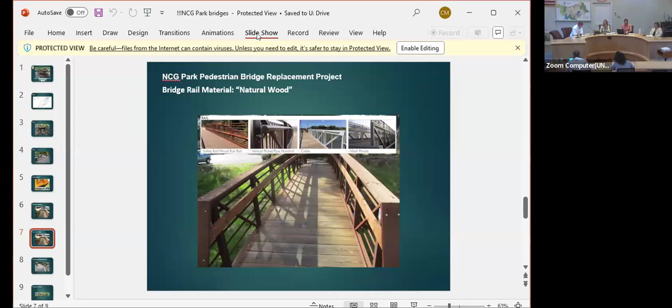So the first project, hold on just a second everyone, the first project we are looking at is the bridges up at Natalie Coffin Greene Park. The town planner will present that project, and then we will take it from there.

Thank you, Madam Chair, members of the Town of Ross Advisory Design Review Group. Rich Simonich, Public Works Director, on behalf of the Town of Ross, who is the applicant tonight. The applicant requests a recommendation from Advisory Design Review to the Town Council for a design review project where the town is proposing to construct, replace - we've already removed the old bridges - the proposed project with 3 new prefabricated steel truss bridges.

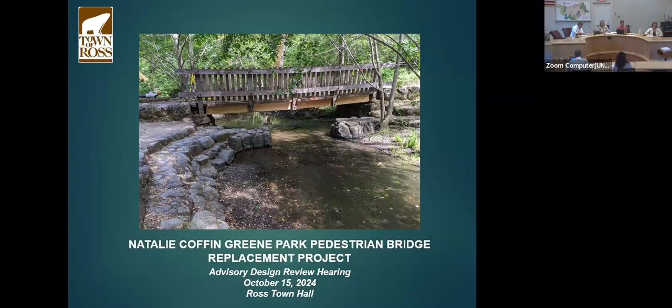So here's a little something to get you oriented if you're not familiar with the park, but I have no reason to believe that any of you are not familiar.

So here's the parking lot as you come to the end of the road at Natalie Coffin Greene Park. And the three bridges, it's the three smaller bridges. We're not doing the large bridge that goes up the access road to Phoenix Lake. That's MMWD, we're not doing anything with that.

It's the three pedestrian bridges. The first one crosses over to the Three Bear Hut picnic area. The second one is the one we just looked at right here. And then the third one is a smaller bridge that comes over into this last smaller picnic area down at the bottom of the slope.

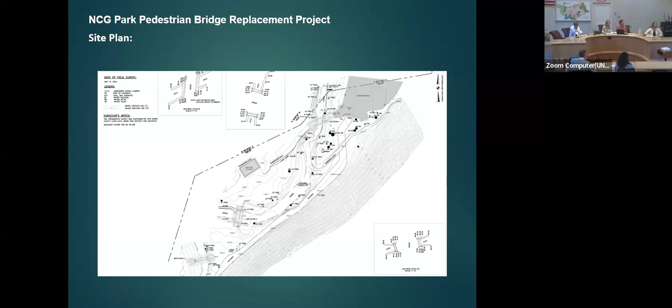And the main access road to Phoenix Lake runs up in this area. So this is just kind of what the first bridge looks like. You can see that this is one of the larger bridges, and the span really isn't that much. It's maybe 20 feet long. We have all the specs, I just don't have it off the top of my head.

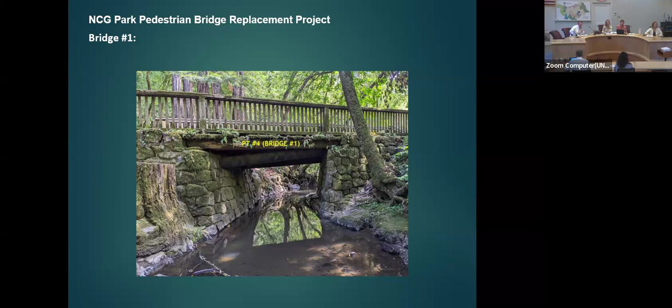But because the spans are so short, we're kind of limited on the product that we can select for the prefabricated bridges, but hopefully you'll like what they have to offer here.

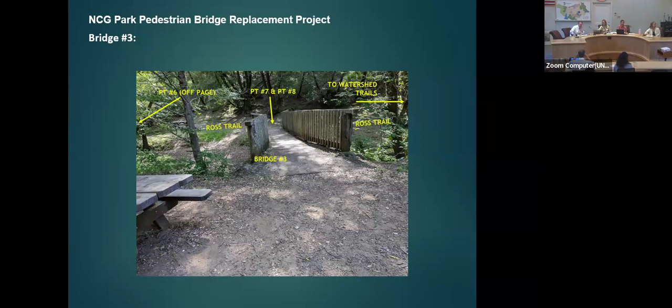So this is kind of the product that we're looking at, and this is the type of bridge that we would be going with. It's kind of the weathered steel that comes pre-fabricated. They'll deliver it to us looking like this, and this is a style you've seen with steel statues and things like that. We felt it was the most applicable, again, to the look and feel of the park.

There are other choices - basically you would have the nice painted, or chromium, or other colored painted steel types, but we felt this would be the best for the park as far as the steel structure.

But we do have a choice in the decking and the railing, so we can go with the natural wood planking provided by the bridge fabricator. The planks might need replacement every 10, 15 years, however it goes. They are easy to replace. Town staff would very easily be able to do that, and we felt that would be the best choice here.

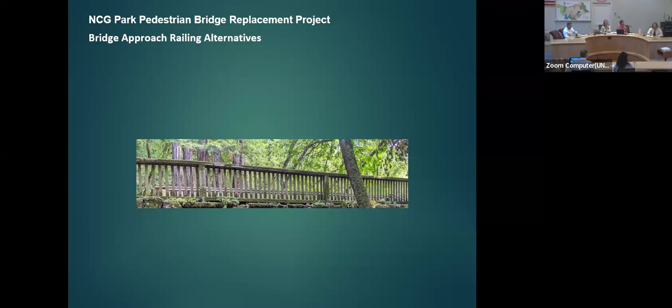Another choice could be the split rail, or we could also go back to what was there now, this picket type railing. But staff feels that the hog wire fence would be a better match to what's up there now and would retain the rustic feel of the park.

So that concludes my presentation for this project, and I'm happy to answer any questions that you have.

Does the ADR have any questions? Yeah, just could we flip back to the handrails real quickly?

Your selection on the wood, I wasn't certain what you're showing in that photo. That top rail, is that wood or is that steel? I apologize, that's a wood plank on cap, on top of the steel.

Thank you, and I didn't go over the other options they have. On the top left here, you've got your basic steel rail type handrail, and then there's cabling, and then there's these mesh panels up there. None of those really grabbed staff's attention as much as keeping with the wooden rustic look.

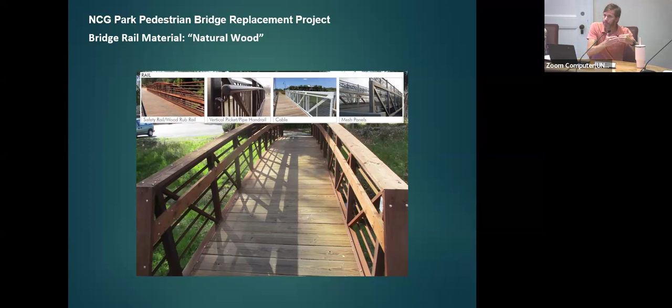And then the approach handrails, the ones at bridge number 1, they're the hog wire one that you pointed out, and the split rail that kind of leads up to the hog wire. Are all those remaining, or will that hog wire and rail and split rail remain as it is today?

Yeah, so that's the zone between the bridge and the Three Bear Hut, that's going to stay there. That's why we kind of like to match the hog wire leading up to that first bridge. So bridge 2 and 3 would have something similar, just the hog wire portion, not the split rail leading to the hog wire, because you don't need it.

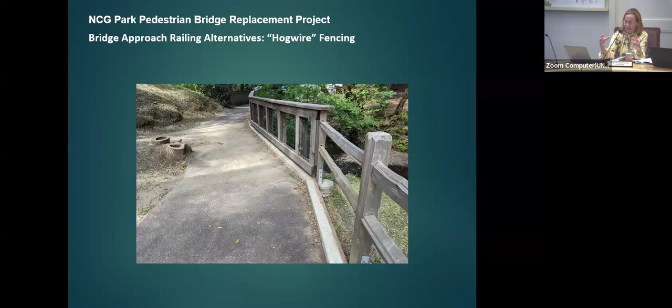Okay, yeah, thank you. I have 2 questions. So the stone abutment will remain on all the bridges, and then the steel structure would just be laid over that? Yes, that's correct. Okay, so that's one question.

And then the steel itself, that finish that looks a little orangey, do we have choices on that? Could we have something that's maybe more like an oil rubbed bronze, or something a little darker?

There may be with other bridge manufacturers, and this brings up a good point, that we can only provide for bid purposes a spec, a performance spec. This is what we want, we need you to match it, as good or better.

I kind of like the idea of the rubbed bronze, that might be something we can consider. I don't think this particular bridge, Contech, really has that. They just have you either go with this, or you get the galvanized or the different painted styles.

I think the Corten is pre-weathering, kind of a thing that will arrest itself at a certain weathered point. If a bronze color is not available in steel other than galvanizing and then painting, I think, right? Because other options would be a galvalume or kind of a galvanized kind of stuff, or a powder painted coating finish.

If a dark bronze is the desire, then I think it's a paint. I think there's no kind of self-protective weathering surface that is a bronze color. I think the Corten is it.

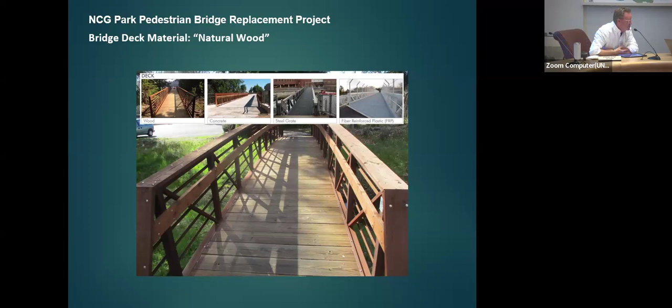I think that's the same finish, it just appears differently - I think it's brighter when it arrives and it does get darker. I don't think it stays as bright orange, but that's quite a bit more mellow. This one looks like it's been in this big picture here for a few years, really, but the same weathered steel is down here too, and it looks a little bit more mellow.

So this definitely looks like they built that bridge quite a few years ago. That's kind of the different types of color you'll see eventually on this weathered steel.

Is it something you would get a sample for? Because in that picture, it looks like it could also be part of the lighting. I can try for the design review portion of this. I don't know if they can send a piece of steel, but I can definitely try. I don't see why they wouldn't.

Maybe they could actually point us to a local area where they've done this, because there are 2 or 3 of these in the area. I know I've walked across them myself. I just can't recall whether there's one in Lagunitas, or San Rafael that crosses over part of the marina area. That could be, I'm not sure they use this type of finish though. Maybe.

I know you can't, in the spec, delineate who's going to build it, but whoever ends up submitting the sample, you may be able to say, have you done something in the local area that people could look at? Yeah, not sure, it's kind of tough with the public bidding aspect of it. Right, we can't tell them you need to use Contact. They can use Bridge Brothers or Continental Bridges and things like that.

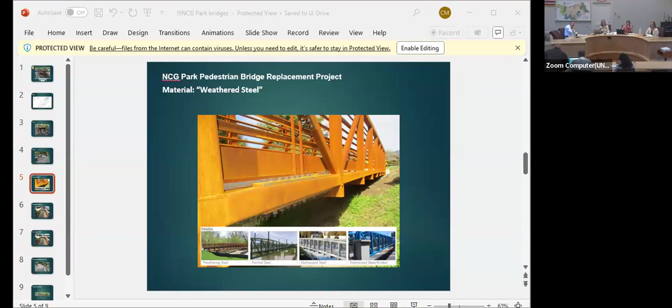Okay, so we are going to bring it back to the ADR for discussion and recommendations to the town council. Who wants to go first?

I like the staff recommendations completely. I like the wood walking surface, the wood rail, and the wood rub rail. I think the photo of the Corten is handsome in the example that shows the rub rail. It would be interesting to get a sample of the Corten, or know what happens to it over time, and if it darkens like that, that would be great. If it gets more orange and more intense, I don't know, that gives me pause. But I think it gets more dark over time in my experience, so I think it should be okay. But I like all the suggestions.

I like the split rail and the hog wire both, so for instances where there's not fall protection required by code, maybe we do the split rail, or if you're going to use a mix of solutions, I would default more to the split rail just because it's more country and relaxed, if there's a choice. But I like all of the suggestions, I think it's a great job and great selection.

Yeah, I concur with Stephen. I think it does darken. Also, that one photograph makes it almost look like it's in bright sunlight, like an almost setting sun. All these bridges are in a kind of dark environment, beneath the trees, so I don't think you're going to get that shot of light on it very often. I think I like the wood pathway surface as well.

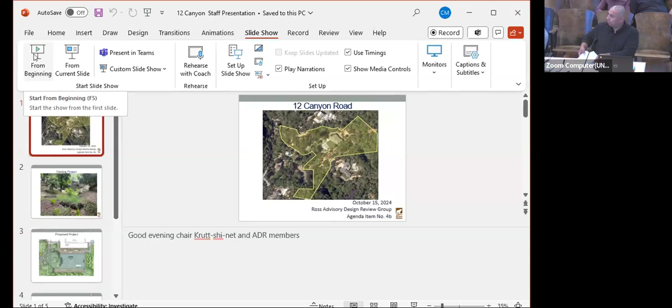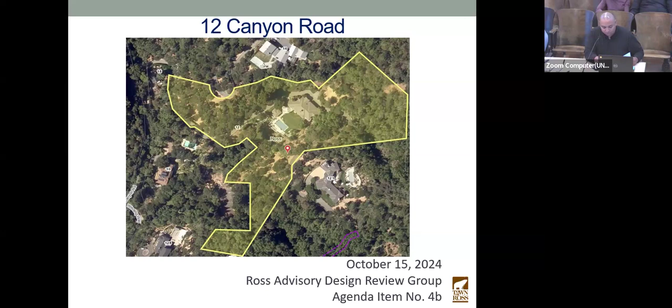Good evening, ADR members. Tonight, the applicant and homeowner at 12 Canyon Road is requesting a recommendation to the town council for design review and a hillside lot permit. This is the existing project here. The project is proposing to construct a 60 by 30 feet sports court on a raised wooden platform adjacent to the existing pool deck. The sport court will be located 45 feet from the side yard setback and 93 feet from the rear yard setback, in compliance with the zoning regulations for the R1 B5 zoning district.

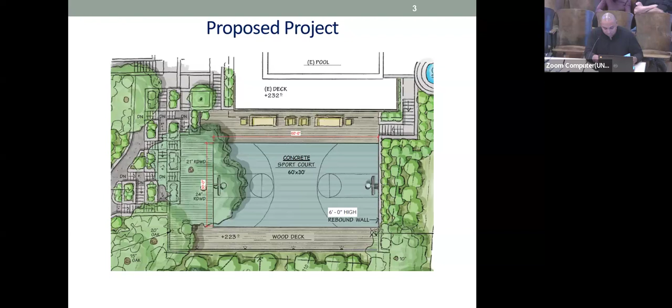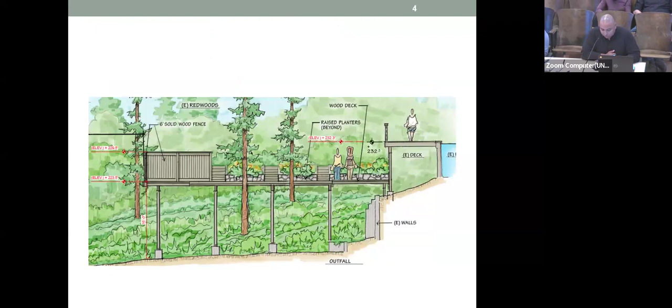The sport court will be a concrete surface and will have a 6-foot solid wood fence. The area beneath the court will remain a natural garden, and all lighting will be low voltage and downward shielded. Staff requests that the ADR group discuss the merits of the project and provide a formal recommendation to the town council. Thank you.

Thanks, Alex. Roberta, were you going to say a few words about what the town had to say about sport courts and pickleball courts?

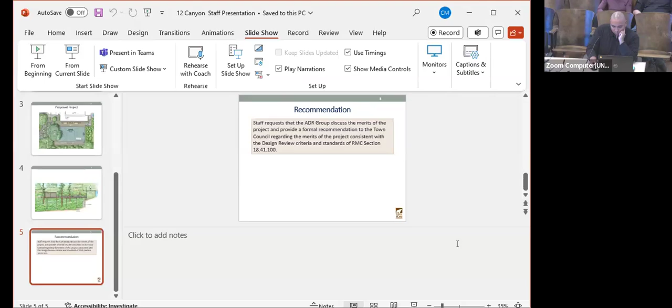Sure. So during the September 12th and then also during the October 11th town council meetings, the town council did discuss pickleball courts specifically. Their guidance to the ADR, because you are reviewing two sports courts this evening, is that there would be a condition of approval that states these two sports courts would be subject to any regulations related to pickleball. During the October 11th town council meeting, some of those possible regulations could either be keeping the municipal code as is and not regulating pickleball courts.

It could be a distance requirement from the property lines. It could be that pickleball courts would not be allowed on residential or private property. And then it could also be that a pickleball court would be a use permit type classification that would require any of the sports courts being approved at Bellagio, 12 Canyon, and 160 Lagunitas to return and apply for a use permit. Likely that would require noise mitigation, whether it's with a barrier, through equipment, possible hours, those types of conditions.

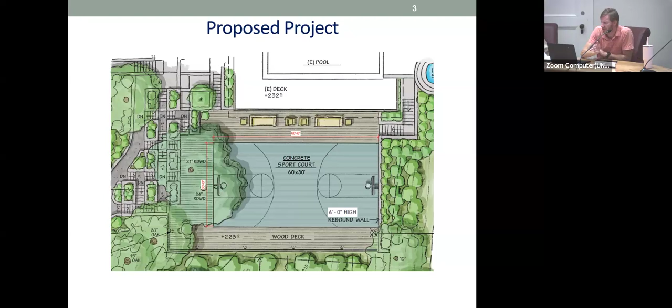Okay, thank you — yeah, I might be thinking of a different tree, on the opposite side from the rebound wall, but I could be wrong. Yeah, that's a horse chestnut. Okay, yeah, I noticed that today. But we're keeping two redwoods — the text kind of blurs the one that's close to the court, and then another redwood within the raised planters that are there now, which we need to rebuild since the bottom parts are falling apart. Part of this is really to beef up the screening between the fence and the court itself, and there are quite a few large redwoods down in that space as well that we're going to maintain.

We're going to remove the bridge, remove the pathways. There's a zip line across this area that's going to come out, and there's an old couch down there, and a bunch of old materials. I think this area is used by kids a little bit, but it's certainly underutilized for this project site.

One other question, Brad, if you could — can you talk a little bit about how you determined the height of this particular sport court versus the height of the existing deck or the height of the base of the canyon?

Well, there's a couple things. If you noticed below the pool, there's a door that goes into the deck leading to the pool equipment. So I used that door to set the height, and I didn't want to remove any of the wall below the pool — there's at least a 10-foot tall retaining wall there. So I have my structure going right over top of that retaining wall. You can see it in that drawing, the existing walls — it's kind of this triple stack old wall, and I wanted the decking to be above that. I didn't want to lower it anymore because on the uphill side I'd start getting into a taller wall. The rebound wall on the uphill side basically has to be 6 feet tall — I could maybe lower it a little, but thought it would be a good wall to have as a return wall. If I lowered the deck, that wall would get taller. So this court got squeezed in, and honestly it fit surprisingly well.

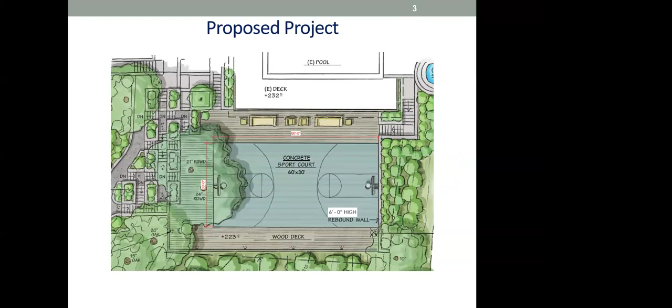Got it, thank you for that clarification. Just to follow up, where is the 6-foot rebound wall you're talking about? That's on... which way is north here... it's on the side of the court, away from the driveway, if that makes sense. If you're looking at the court, there's a wall on the right side. If you're looking at this drawing, there's a basketball hoop on both sides, I guess.

Can you pull up the section with that? It doesn't show it on that drawing. There's an elevation I did, kind of last minute, that staff asked me to create of the rebound wall. I just did this the other day, but I don't know if staff has this or not. I do, I can pull it up right now, the computer's just a little slow.

And that wall is holding the hillside, and then there's stairs bisecting that wall that go up to the existing pool area.

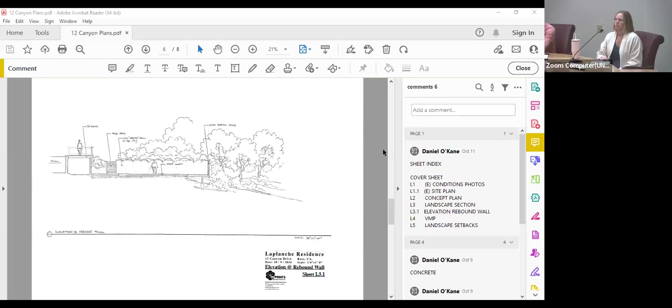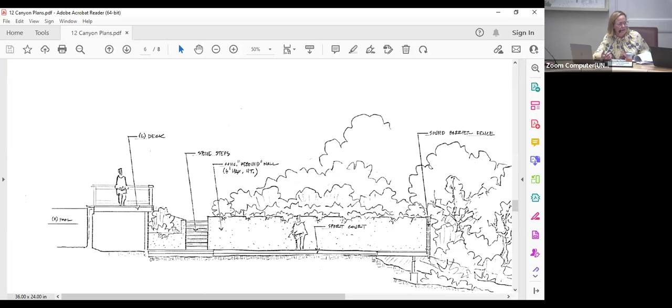I have a question, Brad, it's Joey. If you were to move the entire court in front of the retaining wall for the pool and push it down in elevation, maybe even lose the side deck down the canyon, would you still meet the setbacks? The question is, how much could you push it down and still make it work, lower in elevation, and not use that retaining wall for the pool as your reason for being there. Just go in front of it.

Yeah, the door into the pool equipment has some impact on that too. I could maybe put a landing there and have a couple steps up to that door. I think I could lower it a foot, or maybe 18 inches or so. I'd have to really look at the survey, because there's also the redwood tree on the other side that I was trying not to take out.

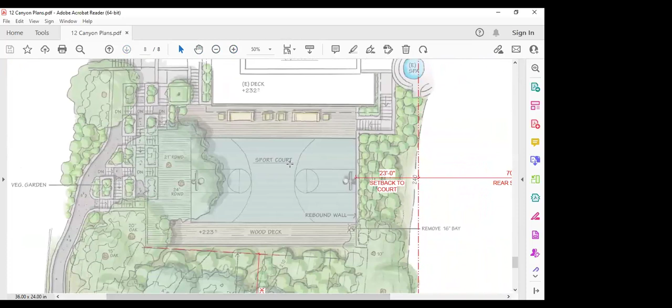So by the hoop on the left side, there's a big redwood tree right there. It's not super big, it's a 24-inch redwood, but I'd have to really look. So if that was a desire, to see if I could lower it, I just need to look and see if I can do it.

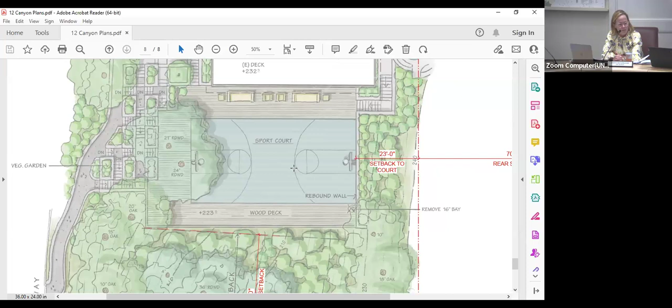Okay, just was curious about that, if we just ignored that one constraint and put it in front of that and pushed it down. Yeah, but when I did this, I used that 45-foot setback as my guide, just to adhere to the 45-foot.

Right, but you have the wood deck on the downhill side, that maybe, I don't know, I'm just asking. Some of the goal of the wood deck was to provide a buffer so balls don't bounce off and end up down there all the time. So it could be looked at. I thought of this a little bit today, could I push it towards the pool a little bit and maybe reduce the deck a little bit?

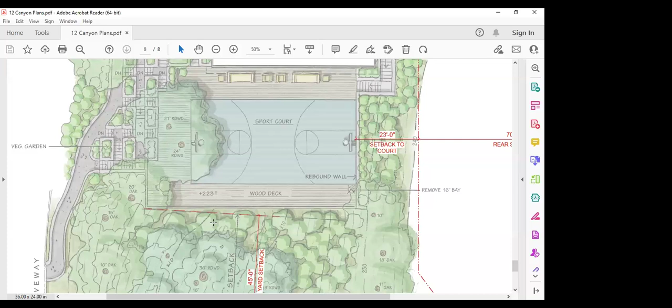We're totally open to talking about some compromises, and this is just, we're trying to get started here.

One other question, the 6-foot fence you were talking about, it's an acoustic fence, is there a certain assembly? I think I saw an assembly described. Yeah, it's basically overlapping boards, so there's not any gap in the boards, so it's got boards that are shiplapped.

That's fine, but after talking yesterday with the sound guy, I thought maybe having this be more glass, because in the beginning I really wanted this to just float in here and be as green and transparent as possible, so when you're looking at it from a distance, it still feels like a natural setting. I'd be totally open to it, and he said a tempered glass barrier could work, or even a thicker plexiglass framed in some kind of wood structure could work as well.

Is there such a thing as a sound-rated plexiglass or glass material?

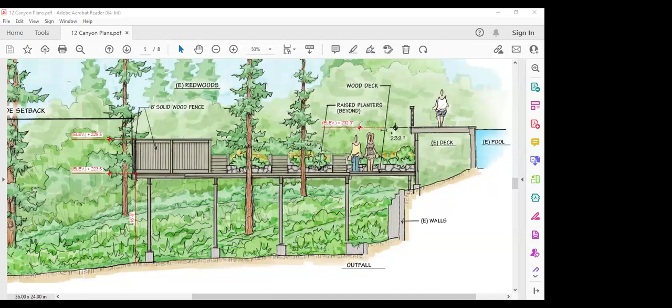He said as long as it's solid, it might be online, but as long as there's no gap. So it would be sandwiched between like 6x6 posts with stops or notched in, it just wouldn't have any gaps in it. He did a whole design on this based on acoustic codes for Ross and Charles Salter, they've been around forever, and he's extremely knowledgeable about this. Yep, I saw the report.

Thank you. Do any of you have any other questions of Brad? I have one additional question, Brad, which is what provides the lateral stability or the seismic resistance in the sideways direction underneath? There would be cross wires or diagonal struts or something underneath, presumably? Well, what we did on this other project, that was 20 feet off the ground, it was like 6x6 tubular steel on grade beams and piers. And I believe there was cabling, cross cabling that went through with turnbuckles that you could tighten everything down. Obviously this is going to be structurally engineered for building permit, but it's a tubular steel structure that tries to keep as lightweight as possible.

We'd paint it flat black, which we could also do with the posts of the railing. Whenever we're trying to get something to disappear, we paint it flat black and then plant all around it and have it go away.

The interesting thing on the San Anselmo project as well is the fire department loved the project. I was shocked when they reviewed the project. They thought it was the greatest fire suppression concept that they'd seen, and they were so highly supportive of it. I don't know if that's any consideration on this project, but I thought I'd throw that in there as well.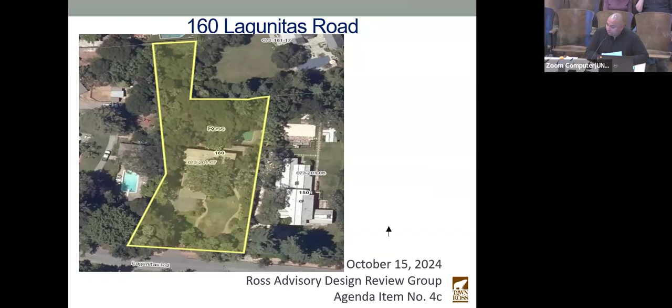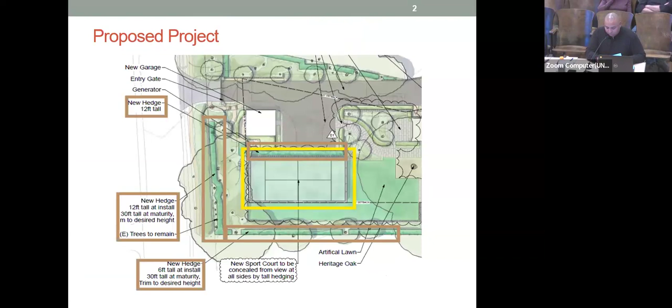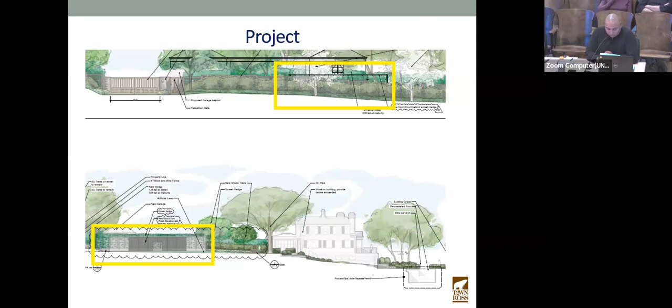Good evening, ADR members. Tonight, the applicant and owner at 160 Lagunitas is requesting a recommendation to the Town Council for design review. The project proposes to construct a 66 by 33 feet sport court in the front yard of the property. The sport court will be located 25 feet from both the front and side yard setbacks, in compliance with zoning regulations for the R1BA zoning district. The sport court will be made of artificial turf and will have a 10-foot-high glass wall with a thin steel frame. The sport court will also be well screened with tall hedges on all sides. Staff requests that the ADR discuss the merits of the project and provide a formal recommendation to the Town Council.

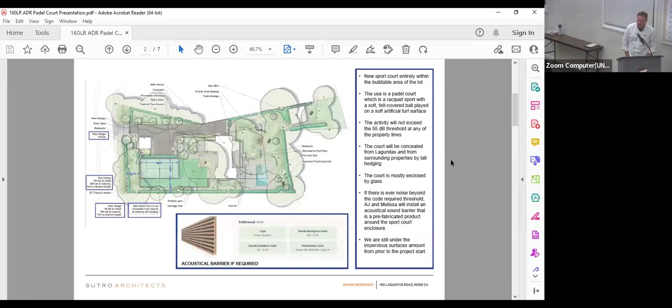This just shows the position of the proposed court relative to the setback, so it's in the buildable area. Eric Blasen is here, and after we talk about the function and design of the court, he'll talk about the screening and the planting around it.

We prepared a lot of information about the sound for this court because we thought we might talk about it this evening. So we can skip over that, or touch on it briefly, but we'll be prepared to discuss it fully at council. This is a padel court.

Padel is new to me, I hadn't heard of it before. Now I'm interested in playing, but it's a soft surface court. It's astroturf, or artificial turf, laid over permeable concrete, so we're not creating an impervious surface with this court. It's a softer surface than pickleball, the ball is felt-covered, and it's played with a racket that's softer than a hard pickleball racket. I just want you to understand what they're interested in doing here.

This sport is growing and is interesting, and the sound is similar to tennis. But because there are glass walls on the court, a lot of the sound is captured by those walls. There are openings at the sides, so there's definitely some leakage, but we've done sound studies, and the decibels erode as you move away from the source, with the glass capturing some of it. We conclude, to the best of our ability, measuring with the client playing on a different court, that it'll be less than 55 decibels at the property lines.

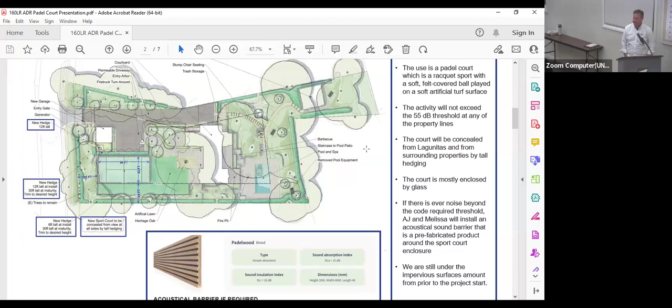I think we can click on the next slide, Alex, please.

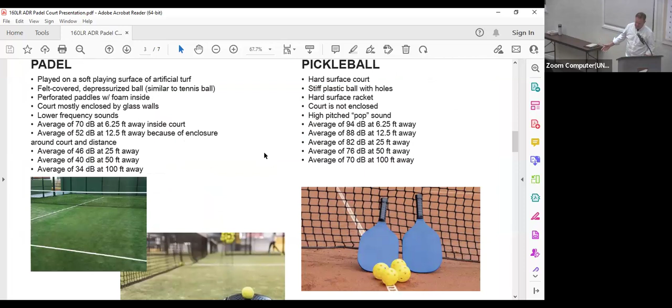These are differences between pickleball and padel, just because pickle is such a hot issue, showing how much sound noise is generated by each and how that sound erodes at distance. We can skip over that and present it to council, unless you guys are interested in question and answer. This is a diagram showing the anticipated decibel level in a circumference around the court, and most importantly at the adjacent property lines, which in our estimation and measurement would be less than 55 decibels.

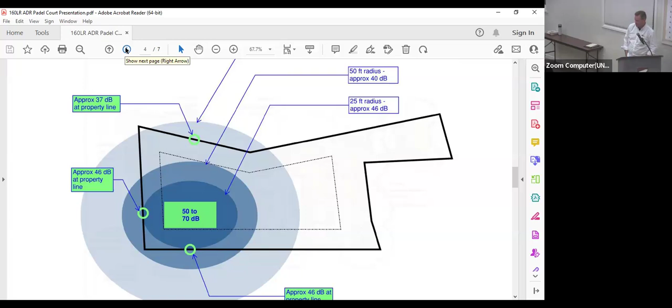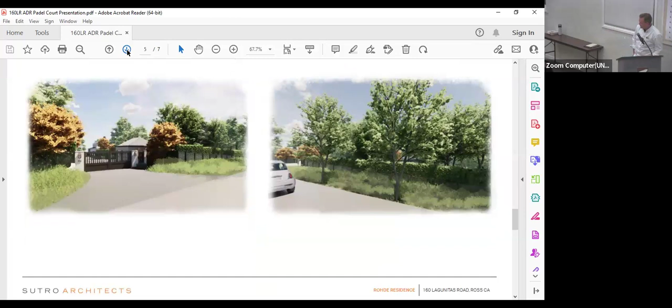You can skip, Alex. These are views, renderings from Lagunitas, and it's hidden from view by the tall hedges behind the fence line, and by a hedge behind the garage, and on the other side by hedges along the property line. So these are disappointing renderings from an illustration standpoint—not very exciting in that it's not visible here, but it's important to see that.

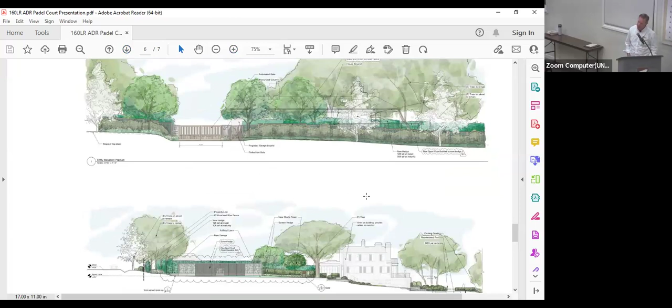Next slide, Alex. These are elevations. Eric, do you want to say anything about these? Eric prepared a planting plan for this, and there's a slide showing a sample specimen they would deploy along the property lines and the fence line, just to illustrate the height upon planting.

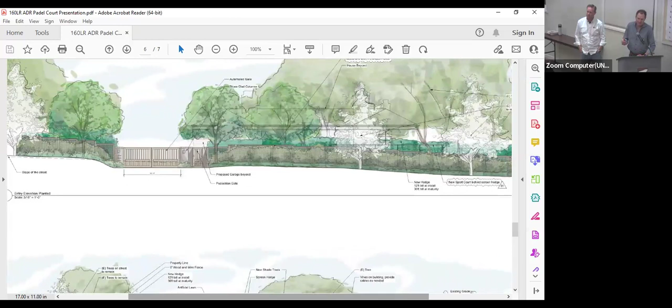Hi, Eric Blasen, landscape architect. On the front area, we're proposing to put in, and I'll show you a picture of the actual plant, a Laurus nobilis, a bay laurel, in a 36-inch box, so it's 12 feet on the get-go, and then it's going to grow even taller.

The other interesting thing is, if you look at the section down below, here's the street, and the padel court is down here—that's a 5-foot grade change, so it's 5 feet lower already from the street level down. We're not doing any crazy grading because it's flat, so it's a very low impact situation that we're doing.

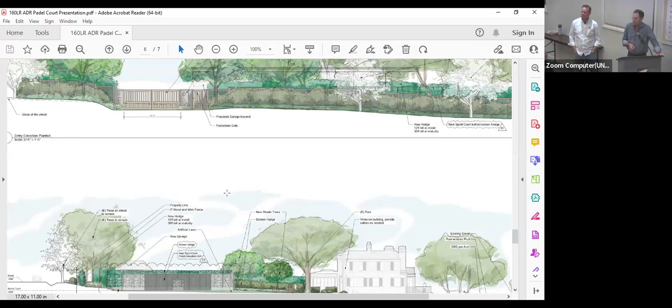So I'd go to the next visual. That's an actual picture of the hedge we're proposing to plant along the street side, and we're proposing similar ones on the sides, but a bit smaller. People coming on the street will never see this because it's also 5 feet lower than the street side is. It's an evergreen, and you can cook with it too—it's cooking day.

So if you have any questions, happy to answer. Thank you. Do either of you two?

I was just going to ask, what spacing for those hedges are you planning? They'll be touching, actually—I want to say about 6 feet, so we won't have gaps in them. And then it'll grow even taller than that, and they can set whatever height they want it at.

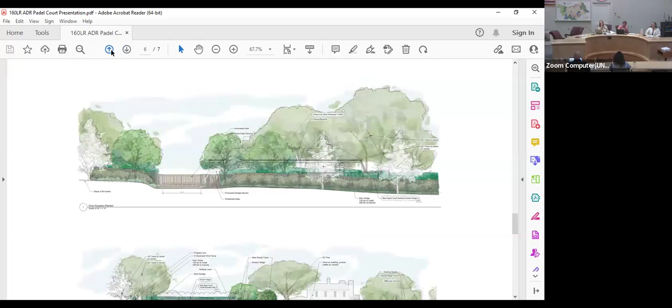Thanks. Any other questions? Maybe one for Stephen—could you give a little more description of this glass? Is glass part of the actual court usage? You mentioned it drops down at some point or comes back up? Just a bit more detail: it's surrounded on the ends and about 40% of the sides. The glass is part of the play, so the court has no out of bounds—it goes all the way to the glass, and the tennis ball, which is more decompressed or softer, is played against the walls. So the glass is part of the specification and part of the sport.

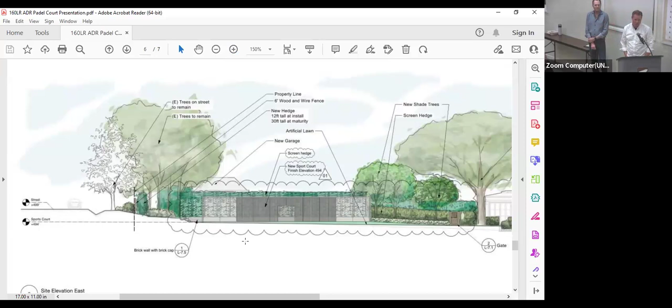The sport also calls for 3 extra feet of height on top of the glass that they don't want to do for visual reasons. So the real sport specifications ask for a 13-foot tall structure, 10 feet of glass, and another bit of chain link above that.

And it was a cross too big to bear for Melissa, who didn't want that. Yeah, thank you. And the glass is just clear? Unless you add the acoustical panels or something?

The glass is clear, yeah, but right on the other side of the glass will be greenery on two sides, and then two sides would face the open yard. About 20 feet away would be the hedge that faces the other neighbor. Both neighbors have lent support, but most importantly, the two immediate neighbors have lent support.

Yeah, there's the extra thing on top that Melissa put the kibosh on.

I have a question. If it sits down, are you using any retaining walls to make it sit lower than the road, or is that the natural grading? That's the natural grading.

Originally, the plan was to have playable lawn or other garden surface, since the natural grading comes up about 3 or 4 feet from the house to the street. So it was going to be graded down, with a low retaining wall at the setback line, planned as part of the garden plan that Eric originally did.

So there's no new grading associated with this, it just nestles in that spot where the retaining wall was planned. There's a small seat wall of about 3 feet tall there, or a little bit of slope berm, and then a 1.5 foot or so wall.